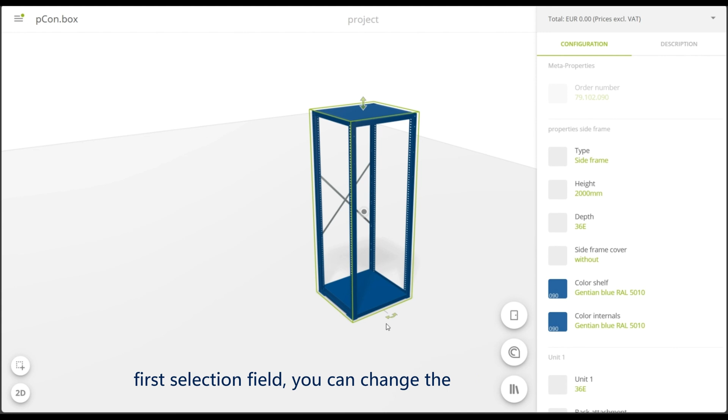In the first selection field, you can change the type of shelf. For other heights, select side frame with extension unit. Next, the height and depth of the shelf can be selected.

When selecting the side frame cover, this is added to the top of all columns. The color of the shelf changes all accessories, side frames, and universal shelves. The color of the internals changes the color of the drawers and adjustable shelves.

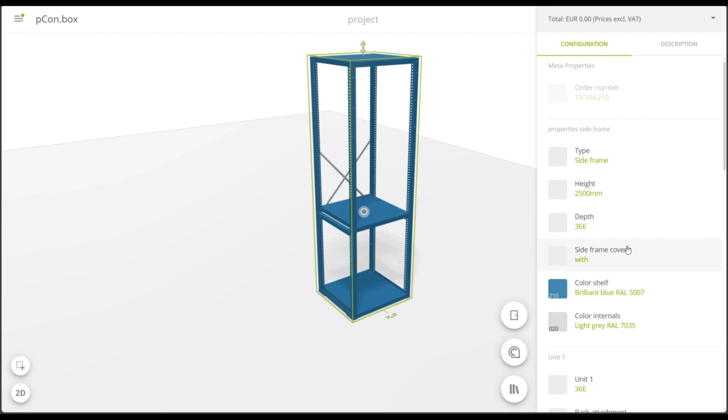For Unit 1, the width of the first unit can be changed. The attachments at the back can be changed from a diagonal crossbrace to a back wall.

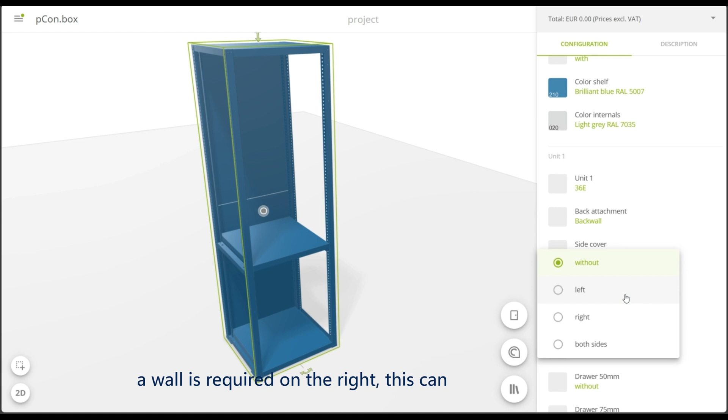A side cover can be added to the left. If a wall is required on the right, this can be selected at the end when configuring the last unit.

An additional universal shelf can be added to the unit, or the existing ones can be changed to a lock and fixed shelf. You can select the locking mechanism for a lock shelf.

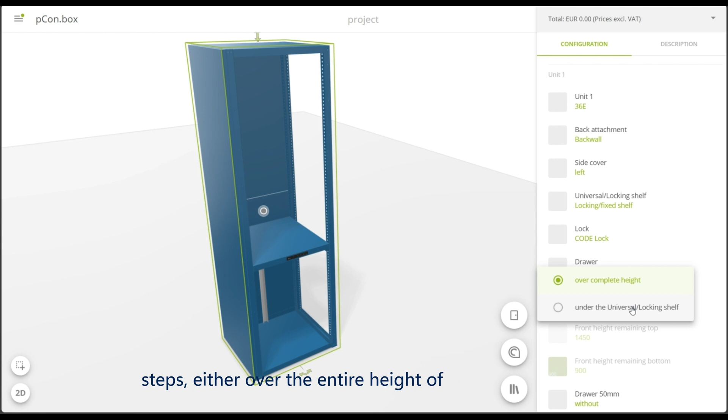The next selection, Drawers, changes where the drawers are located in the next steps, either over the entire height of the shelf or only under the lock shelf.

The height of the shelf changes the height of the lock or universal shelf. If the setting is selected under the Universal/Locking shelf, the field for the adjustable shelves appears further up. These are inserted above the lock shelf.

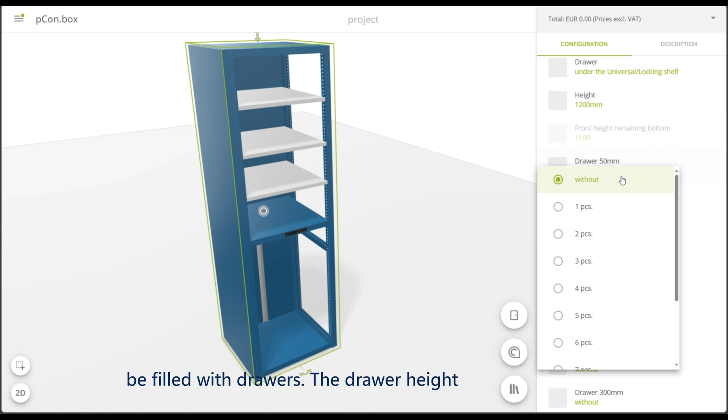The remaining clear height field shows the remaining available height that can still be filled with drawers. The drawer height fields can be used to select the number of drawers to fill the shelf.

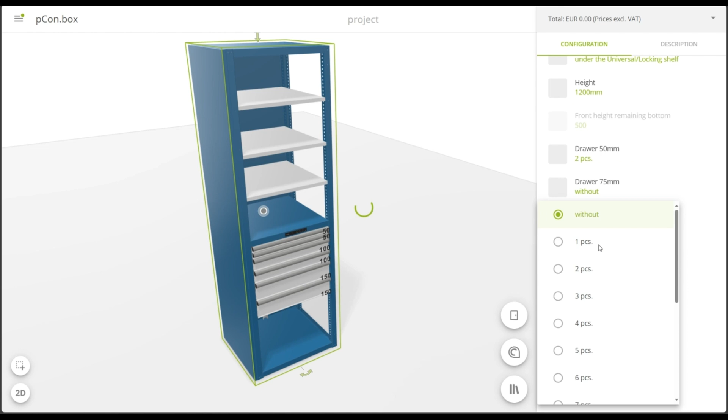To add another field, click on the right-hand side frame to display the same selection options as for the first field. To add the field, select a width again under Unit and configure the field. This process can be repeated as often as required.